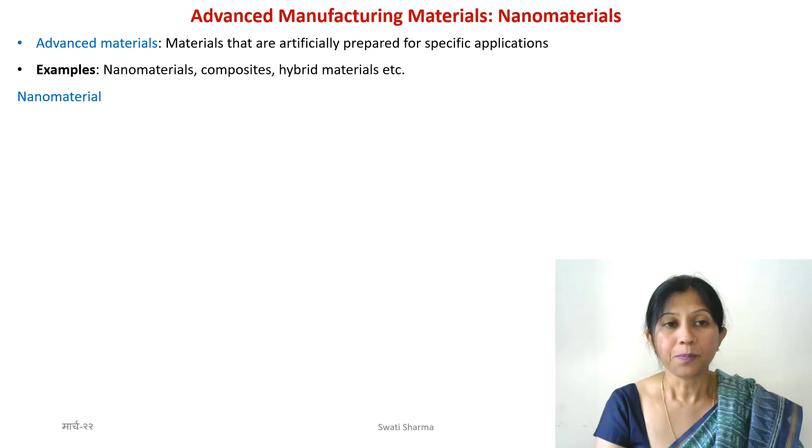Okay, so now the classes of materials that we are going to discuss in this lecture: nanomaterials, composites, and hybrid materials. These are some names that you must have heard. Nanomaterials, I'm sure you even learned some fundamentals in your school days. Composites, maybe you haven't learned, and hybrid materials, well, these are the things I'm going to tell you today. Okay, so let's start with nanoscale materials or just nanomaterials.

So what do you understand from nanometer? Everybody knows that 1 nanometer is equal to 10 to the power minus 9 meter. Okay, so this is something which is extremely small. You cannot see it through naked eyes. Even using traditional optical microscopes, you cannot see nanoscale structures. They are so small. 10 power minus 9, you can imagine that is really an extremely small unit.

Human eye can barely see down to 25 micrometer. Okay, so that is the limit of resolution, resolving two separate things. 25 micrometer is more or less the limit of a human eye, and that is also not my eye, right? I doubt if I can see micrometer at all. So the point is, nanometer, definitely you cannot see or touch or feel.

Then how can we have this entire technology now known as nanotechnology, where so many nanomaterials are being used, right? And how do we make those nanomaterials? And if we make them, how do we know that these are nanoscale materials, or how do we know that we made what we wanted to make? Now, all of these things come under the umbrella of nanotechnology. We are going to just talk about nanoscale materials.

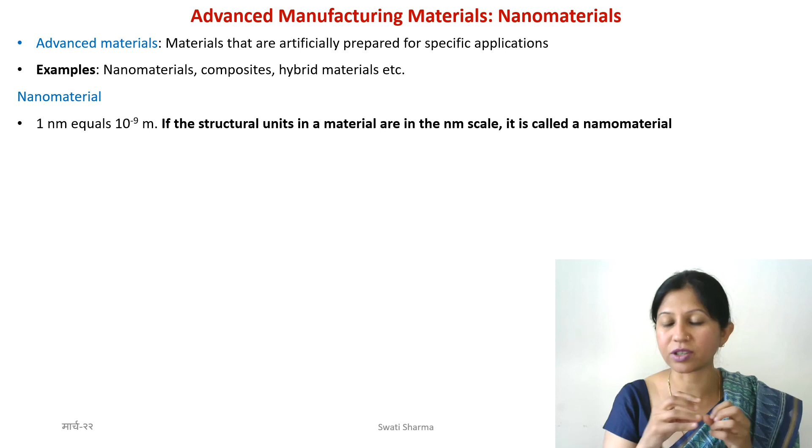So if I have a material which is composed of tiny little structural units, and each unit is in the nanometer scale, typically below 100 nanometers. You cannot say 5,000 nanometer. It has to be below 100 nanometer or around 100 nanometer. Then we call that entire material, the set of these little tiny nanoscale units, a nanomaterial. Okay.

Now, you can always say that every material is made of atoms, and atoms can also be angstrom level or some nanometer scale, you know, 1 nanometer or so. And you can also say that, if we don't think about atoms, at least we can think in terms of molecules. There are several molecules, they are definitely in the nanometer scale. So then, by that definition, every material is a nanomaterial, right? Because it is made of nanoscale units. Well, that is not the case.

Why? Because we call any material a nanomaterial only when we have designed that material. We knew what we are going to make, and we have a certain set of properties in our mind when we are making those materials. So only when they are very specifically designed do we call them nanomaterials, especially those that are used for technology applications. Okay, and there are also some other conditions.

So number one, these structural units that we are talking about should be reasonably larger than atoms. They can even be a cluster of several atoms, but still we are not talking at the atomic scale. If we take a single individual atom as a single unit, that will not work. That does not define nanomaterials, because in that case everything will be a nanomaterial, right?

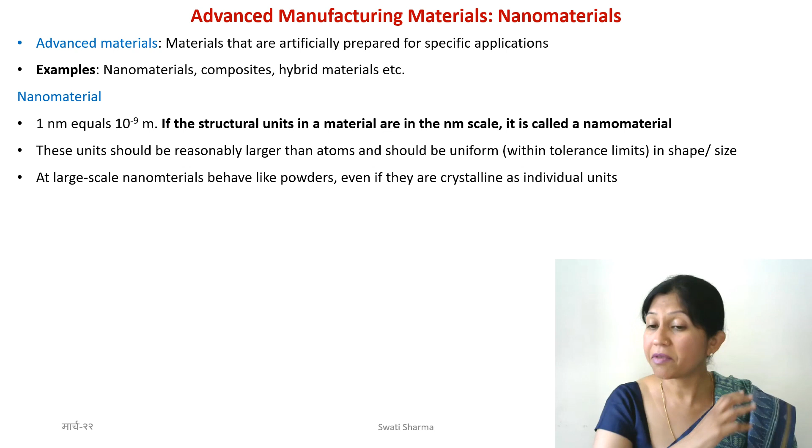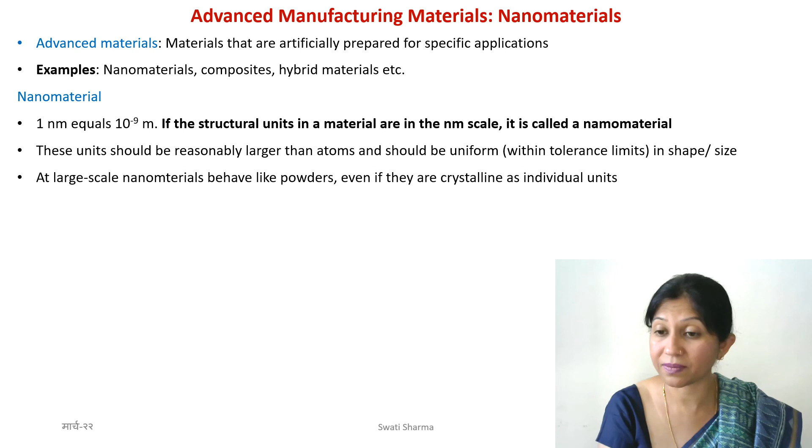Okay. Now, are they crystalline or amorphous? This is a big question, right? Especially when we talk about manufacturing, everything depends on crystallinity: every processing technique, properties, everything. In the case of nanomaterials, now we have thousands of nanomaterials. It's not like one or two. It's not just carbon-based or silicon-based materials. Many of them are still in their research phase, but there are thousands of nanomaterials available in the world at this point.

Some of them are amorphous, some of them are crystalline, some of them may have some very strange structure. For example, fullerenes: it's very difficult to define whether they are crystalline because they do not fit the traditional definition of crystalline materials. But there are even crystals nowadays, for example graphene, that is a single layer. So we have two-dimensional crystals. So the definition of crystal and amorphous is also changing as the technology is developing, especially in the nano regime.

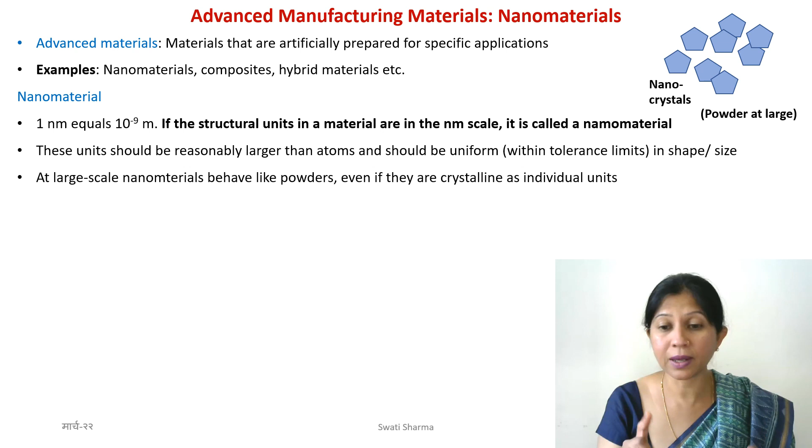Okay, so coming back to the question, are nanomaterials crystalline or amorphous? Well, it depends. There are so many different materials. Some of them are crystalline, some of them are amorphous, and some can even be a mixture of amorphous and crystalline, or may have completely different geometries. However, one thing we know for sure is when we have a nanoscale material, see these pentagons I have drawn here. Let's say these pentagons are some pentagonal crystal structures. Let's say it's copper nanoparticles or some other metal nanoparticles.

They may not exactly be pentagonal, but something like this, crystalline shapes at nanoscale. When we put a lot of them, millions of them together, then to our eyes, they will still look like powders. So in their dry powder state, we are going to use them for manufacturing.

Or, you know, manufacturing is again, now you should not think in terms of traditional manufacturing where you use big machines or what you will be doing in your workshop, but here manufacturing can be also making small scale devices, printing, for example, using these nanomaterials. You make an ink out of it.

You can also have some tube like structures, which you may have heard a lot. So tubes are typically grown on a substrate, on a support. Substrate is a fancy term for support, right? Like a plate. So these tubes are grown on top of it. Now if I remove them from that support, then again I will have these randomly oriented tubes again in the form of a powder.

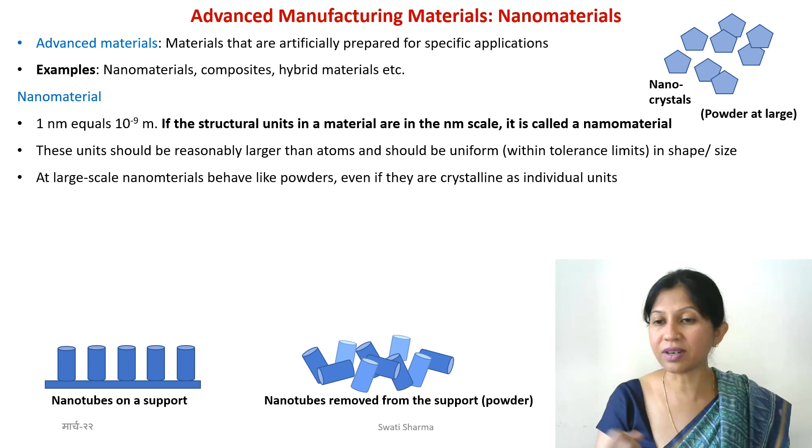So when I purchase carbon nanotubes or copper nanoparticles, I will get them in the form of a powder if they are dry, or they can also be sometimes given as a suspension in a liquid. So they are dispersed in a liquid, not dissolved but dispersed. So in that case they are in that suspension form. Okay, so the nanomaterials that you will be using for making anything will typically be in suspension or powder form.

Now what do you do with them? What can you do with any powder? Well, there are a lot of powder processing techniques. You also know that for ceramics we use powder processing techniques. Can all of those techniques be used for nanomaterials? The answer is no, but some of them can typically be used. That again depends on the properties and structure of the nanomaterial, right?

So what we often do is we mix them with some sort of binder or glue, which is a polymer similar to the glue that you have at home. So glue that you have at home for sticking anything, that's also a polymer, right? So similar glues can be used for mixing that nanomaterial in it and make ink like things, and then you can draw with that. So that is how nanomaterials are used. So this is one most common method of using nanomaterials for making anything for manufacturing purposes.

Okay, you can think of other powder processing techniques as well. There is also one name I have mentioned here, lithography, but again that is much beyond the scope of this particular course, some other time. Okay, what else? One more thing that I have written, nanomaterials do not form large scale crystals.

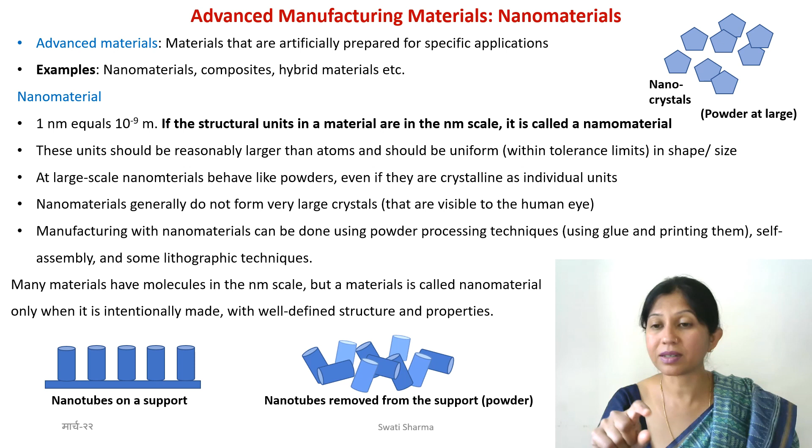Okay, so now I will end this particular slide here and start a second part for composites, just to keep the topics separate.